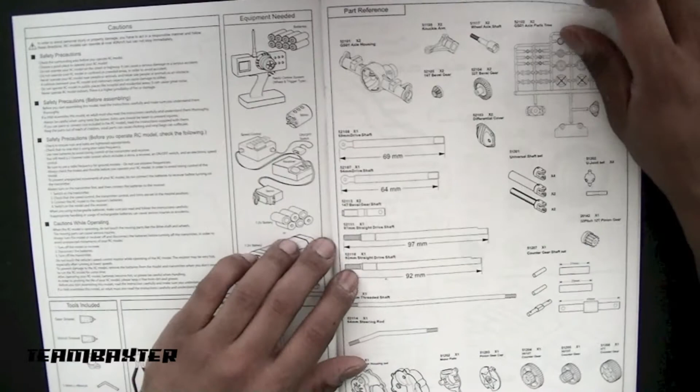At first glance, it's a typical manual. Just the parts.

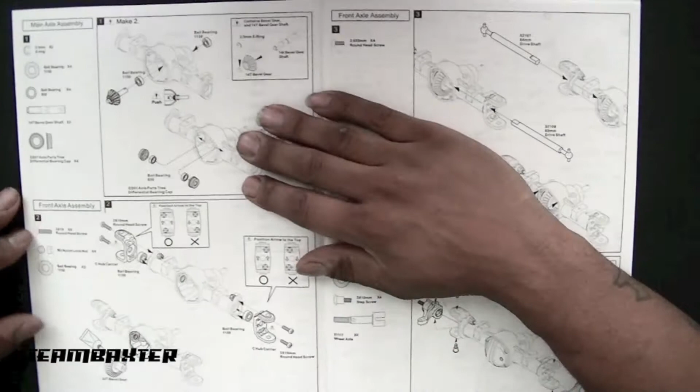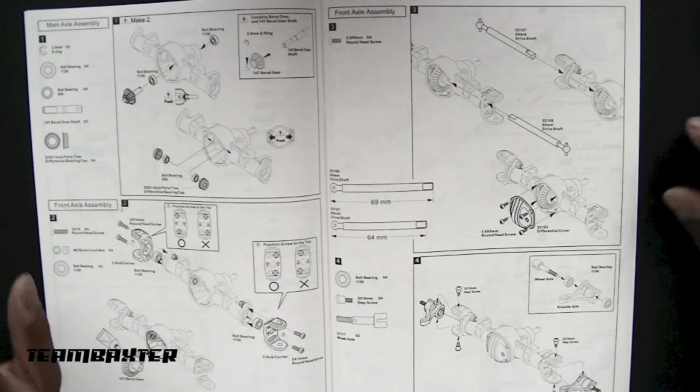They are tiny axles, like I noted before. They get a little bit larger once you put the end pieces on. Not too much different in the axles. They look pretty much the same. There's specific orientations that you have to follow when you're installing them, just like anything else.

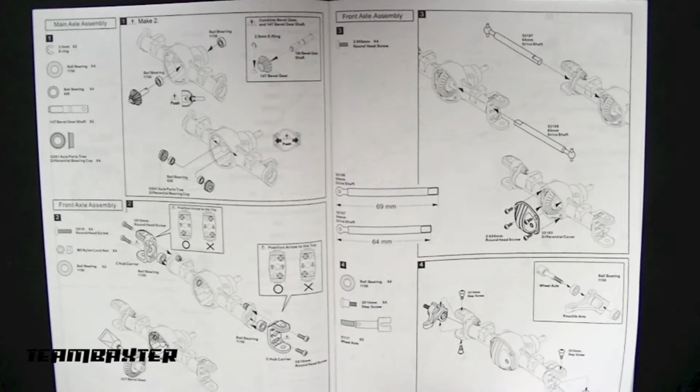A little different, but not too much. Pretty much typical axles. These look a lot like the other Gmade hardware I used.

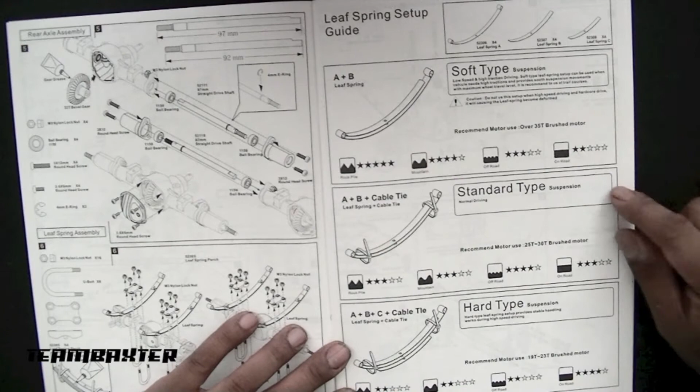You got your three different methods of suspension, how hard you want it. This one up top seems to be the one that I'm gonna do.

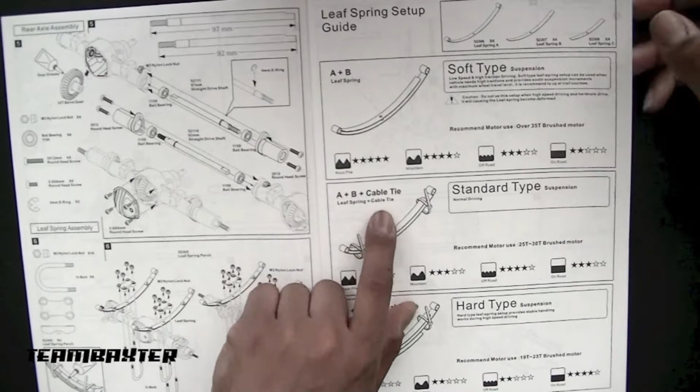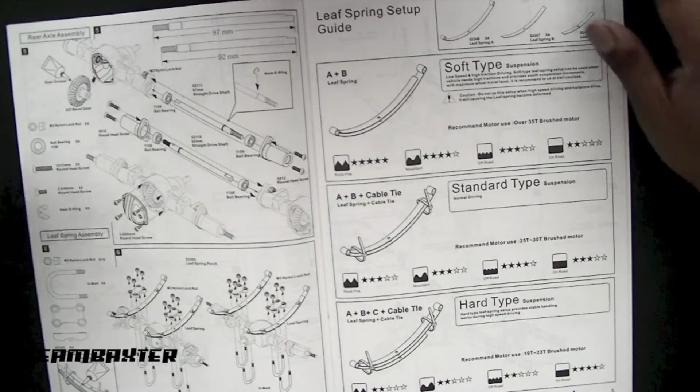Soft suspension for crawling and trailing. But the leaf springs are quite a unique touch for any of the kits that I've built so far. I have no trucks with leaf springs on it, so that's going to be pretty neat to get that together.

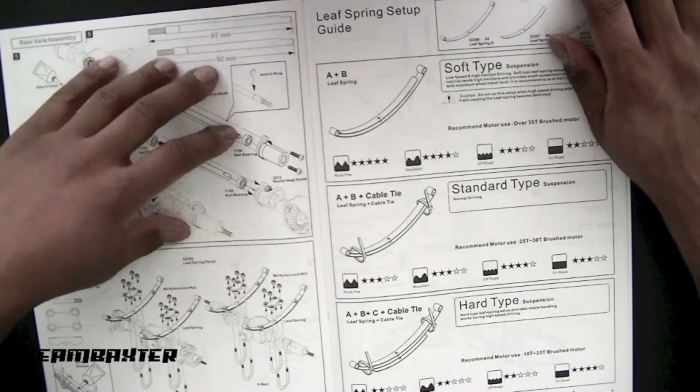Up until here, the axles are the same, and then we switch over to the suspension. And like I said, they have quite a few different methods of installation, so that's going to be pretty neat to put together, to work through.

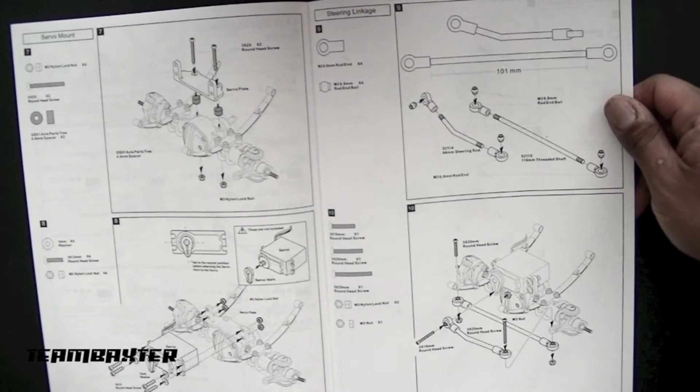So you get past the suspension, and it's basic stuff again. Your servo mount and your servo linkages. They give you aluminum linkages here already. Metal linkages, let's say metal linkages. I assume that they're aluminum, but for the sake of being correct, let's just say metal linkages.

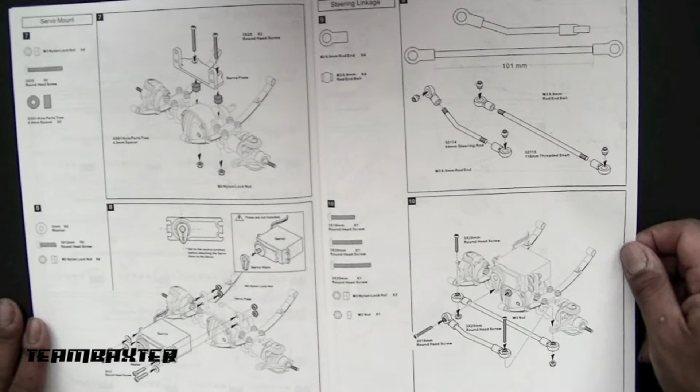I do not have my electronics right now. I'll be building this kit without electronics. I'm not quite sure which way I'll go with the electronics. I'm thinking about going with the Tekin 35 turn system and the FXR to go with it.

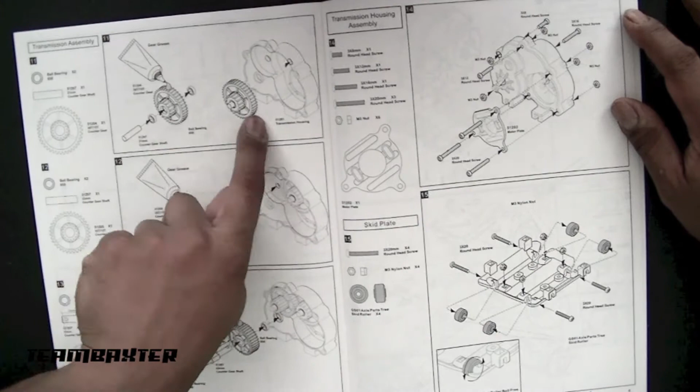Typical tranny setup. The gears are a little bit different. These again are similar to the R1 gearing, just the shape and the general setup of the transmission.

I always use my favorite grease, red and tacky, with this, and I'll be using that again here. A unique skid plate. The skid plate has these little rollers on them. I guess to help overcome obstacles. I don't know if that'll help. It certainly won't hinder, but that's something new I haven't seen on any of the other kits that I've done.

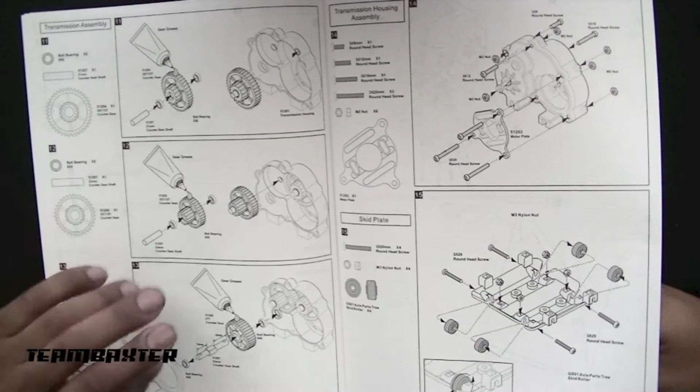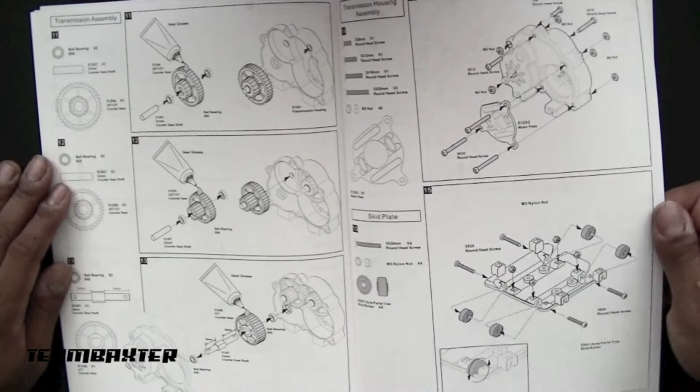I never use the included grease. Some kits, like the Associated kits for instance, use their own grease, which I use anyway, like their silicone oils. So I use those, but that's generally it.

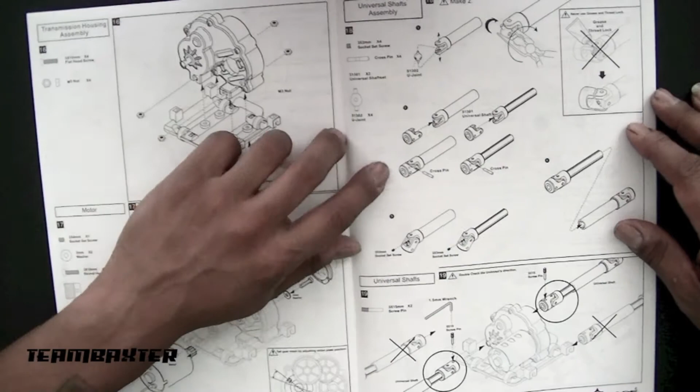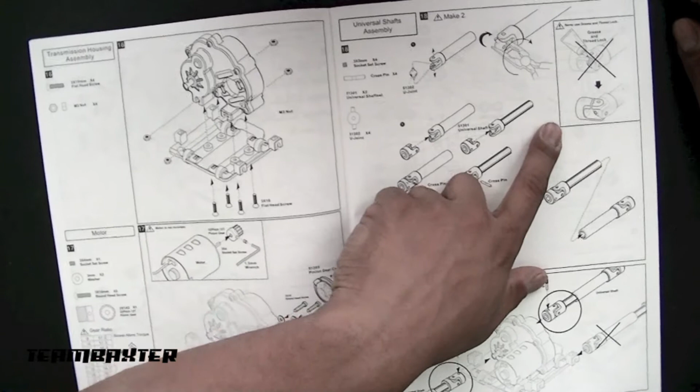The shafts are pretty much the same, except I use grease on all my hinges in my shafts when I build them. And here in the Gmade, they specifically ask you not to use grease or thread lock when building their shafts.

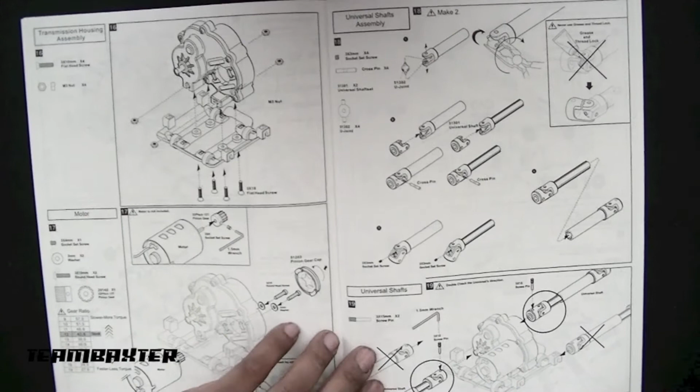I guess they expect that little bit of slop to help the truck. They need that little bit of slop to help run the truck a little better. That's just what I assume. I don't know for sure.

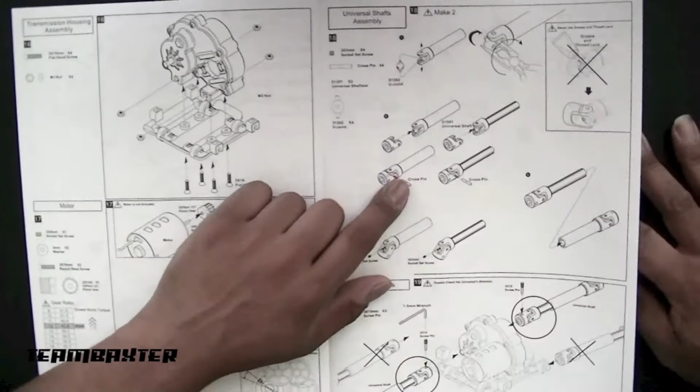But other than that, the shafts are pretty much generally the same as other shafts that you might encounter on other kits.

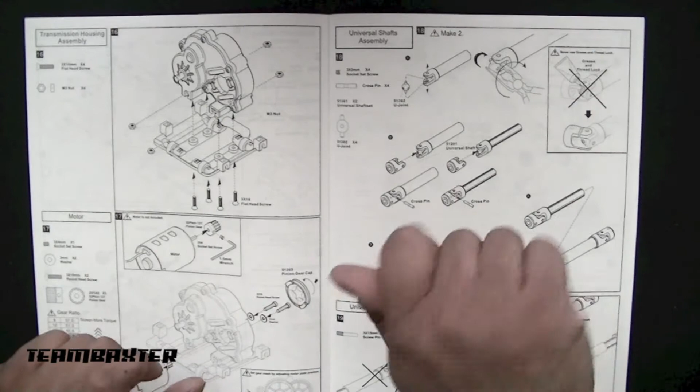The pins have to be kind of wrenched in with a pair of pliers, and that always stinks, but you can make it happen. It's not the end of the world.

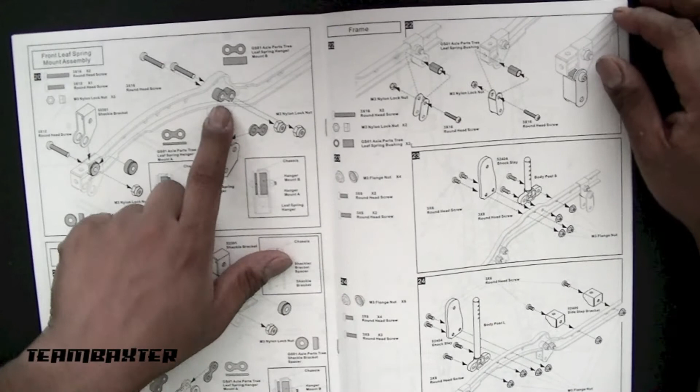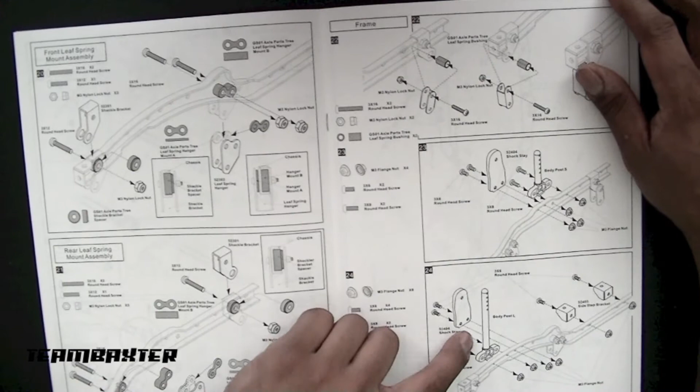Now here's where things get real different from the SCX10. There's a lot of little spacers and all kinds of sorts of little things that attach to the frame here.

I'm not quite sure why they need all these spacers or why they didn't run things flush to the C-frame, but in any case the spacers are there, and that's what I'm going to need to do to get the truck built.

The shock hoops are different. They're just shock posts. Well, they call them shock stays, and those are quite a bit different.

They're solid pieces of aluminum. I think I showed these on the unboxing. And they stand straight up.

Not too different. The axial has plastic shock hoops. It's just one little difference between this and the SCX10 kit.

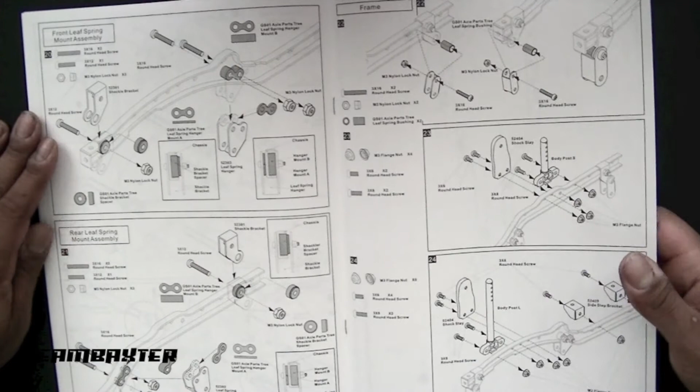There's your frame after it's built, and then everything slides together right after that. Neat little receiver box, and then the ESC mount is directly attached to it.

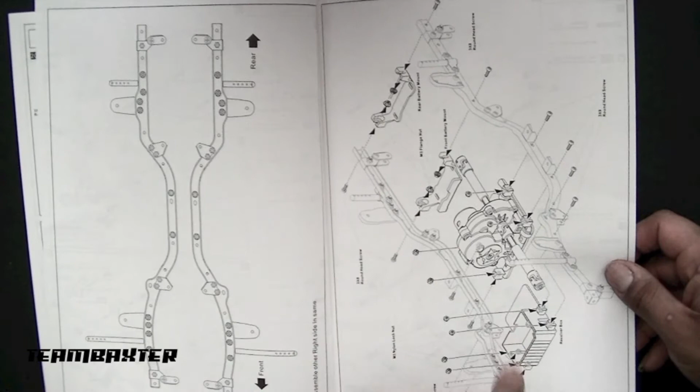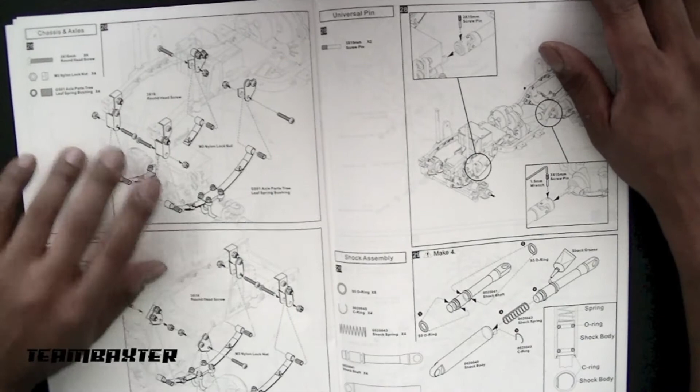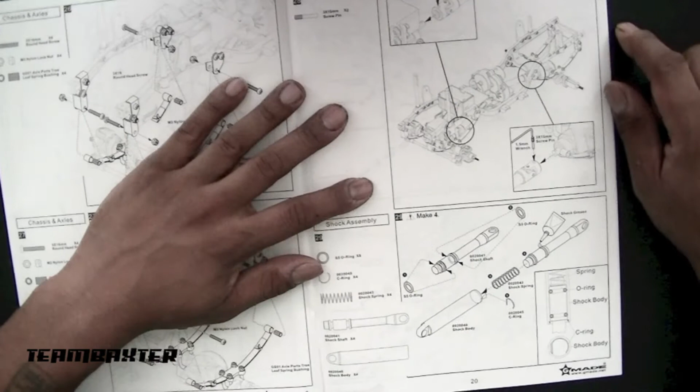These shocks, they're not oil filled. There's a couple silicone O-rings in them, and the shock spring on the inside, and all of this is held in by a little C-ring.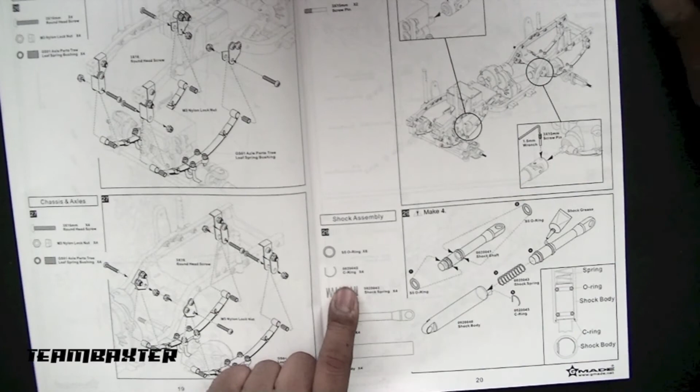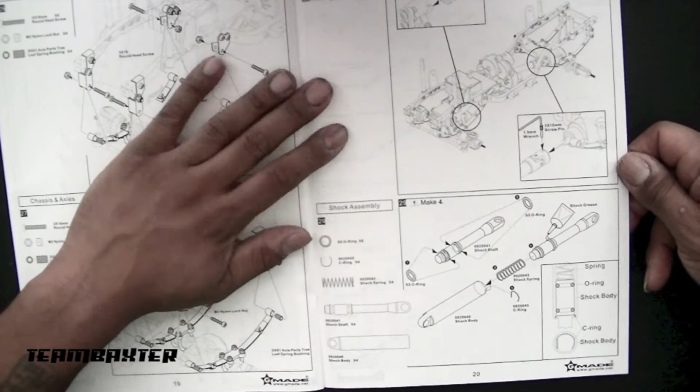So I'm really interested on how those go together. I've done several videos on shocks, and I'll probably do the same for these since they're so different. I like to profile most of the shocks that I do, and especially when there's a different assembly going on.

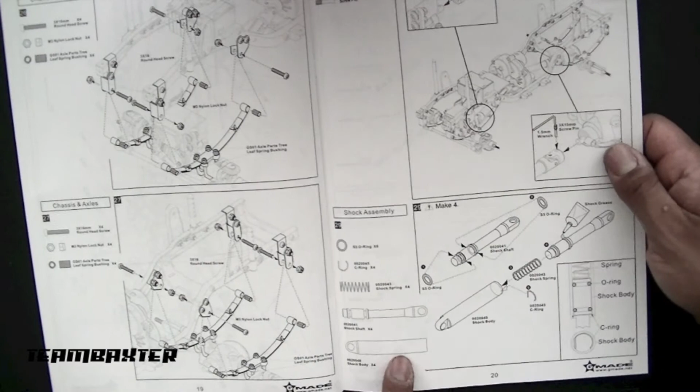Those are quite new. I haven't seen anything like those, so I'm pretty interested to see how those turn out. I think those are just to supplement the leaf springs as well, so that may be why they're not oil filled. I don't know. I'll find out as the build goes on.

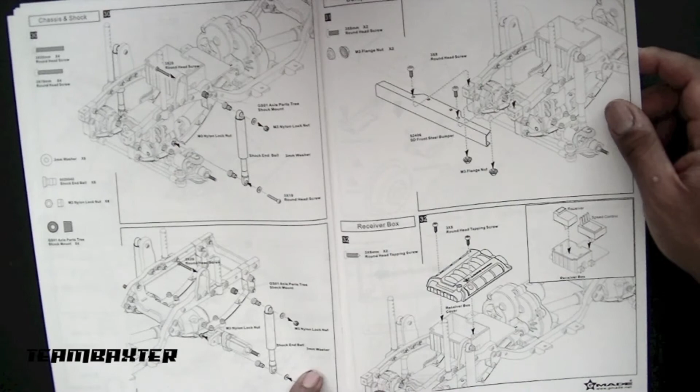And from there, it seems like it's just tying it together sort of thing, installing your bumpers, your receiver cover, tires, batteries. I'm gonna have to make a

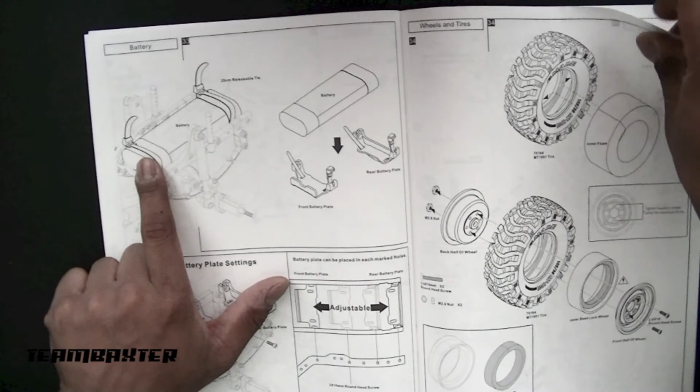Velcro battery strap for this, like I did with the R1, because the plastic zip ties just they're not gonna cut it for me. So see what else I can do.

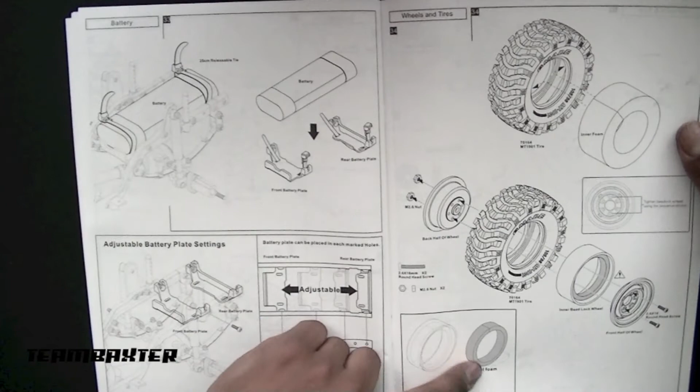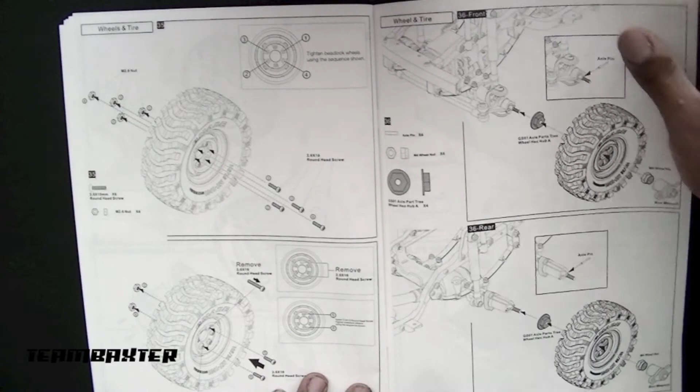They have instructions to put the foams in the wheels, but the foams already came in the wheels. And that's about it for the manual for the build.

Clipping out your body, of course, and getting all the accessories put on.

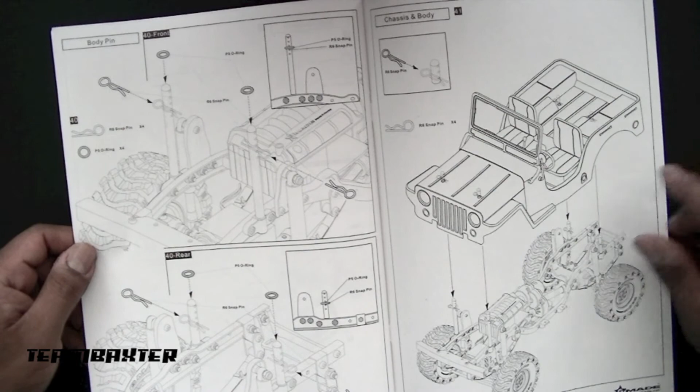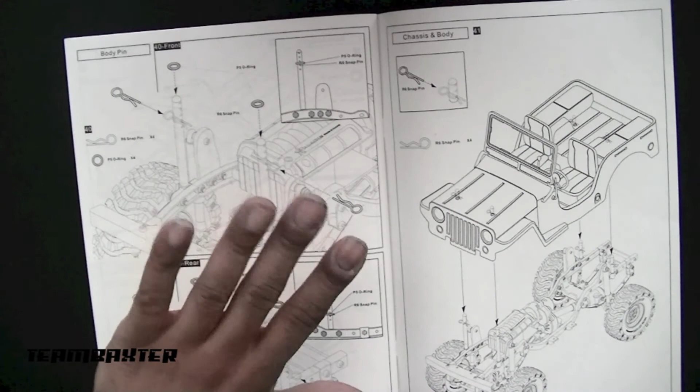But after that, it's just, oh, that's interesting. There's an O-ring that goes on after you put your clip in, and that all holds your body on. So that O-ring acts as sort of a cushion to hold the body up, so it doesn't give that rattling.

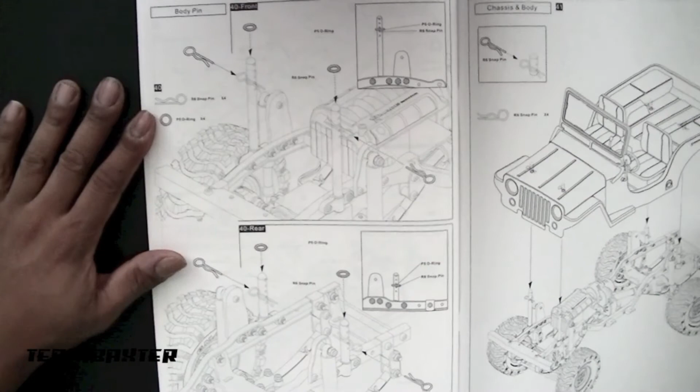That's pretty nice. That's a nice feature I haven't seen anywhere else either. And then that's about it for the manual.

So I'm actually getting ready to start building this right now, and like I said, there'll be videos for different things, especially those shocks. I'm real interested to see how those shocks turned out. So that's the Sawback manual.